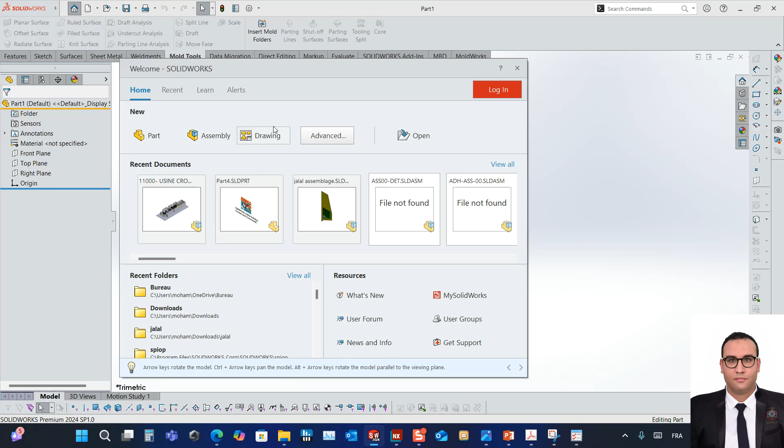And for the fifth and final advanced tool, there is the drawing tool, which is here. If you go to drawing, there is an entire certification specified for drawing. Now, let me go to the presentation and introduce it to you.

So, as you see, this is the certification that I presented to you, and those are the core certifications: the associate level, the professional level, the expert level. In order for you to pass the expert level, first you need to have 4 of those 5 advanced tools.

See here, certified SolidWorks professional advanced. Those are the advanced tools. You need to pass successfully 4 of them in order to be able to pass the expert level. Understand? So this is the way to obtain the expert level.

And there are also other certifications like this sustainable design, which will allow you to reduce the cost of your design and optimize it for a sustainable way, like making it recyclable and less costly. That is the sustainable design certification.

There is additive manufacturing, which is basically 3D printing. There is the simulation certification, which will allow you to simulate almost anything in your mind, like structures, thermals, vibrations, everything like that.

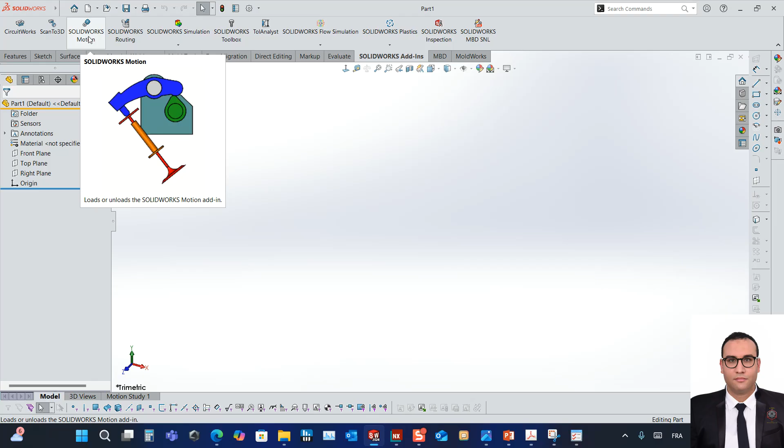This is the SolidWorks Motion tool - it will allow you to create any motion you want. This is the Routing tool, including pipe routing, electrical routing, tubes, everything about piping and routing.

This is the Simulation tool, as you see here. Like I told you before, there is a certification for simulation. This is the Toolbox - all the standard parts are in the toolbox.

This is the TolAnalyst tool, so you can analyze the dimensions in your parts and see the problems if there are any in the dimensions, so you can make the part work properly.

This is the fluid simulation. When it comes to fluid simulation, computational fluid dynamics, this is the other tool you need to use. This is the plastic tool. It will simulate almost any plastic in your injection mold.

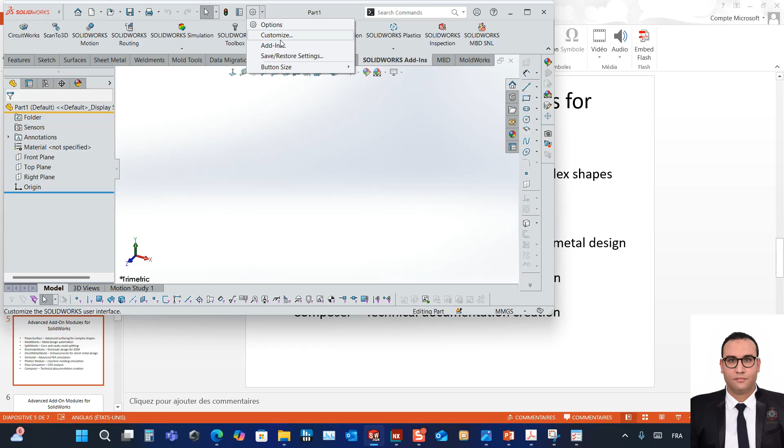This is not all of them. Like I told you before, there are also other tools, like you see here. Those are the basics that I just introduced to you. There are the manufacturing tool, the electrical tool, the SolidWorks Visualize, which will allow you to create good 3D videos or presentations of your product in SolidWorks.

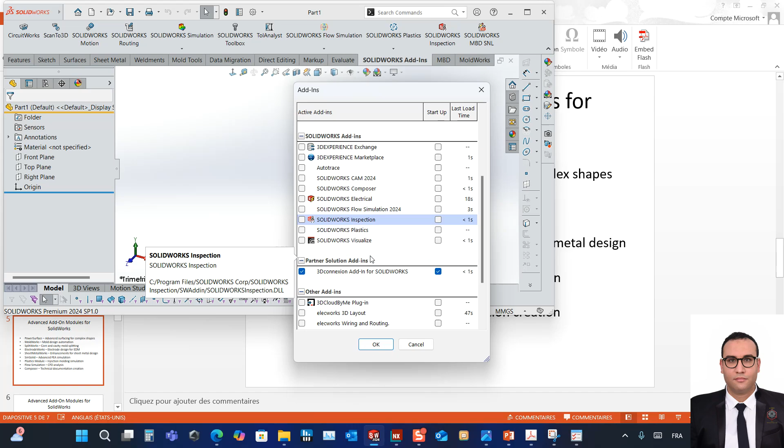And after that, you will have those. What are those? Those are the modules here that I have just introduced to you. Those models will allow you to improve in SolidWorks faster and use it without any problem. And as you see here, those models, I would introduce to you one of those models.

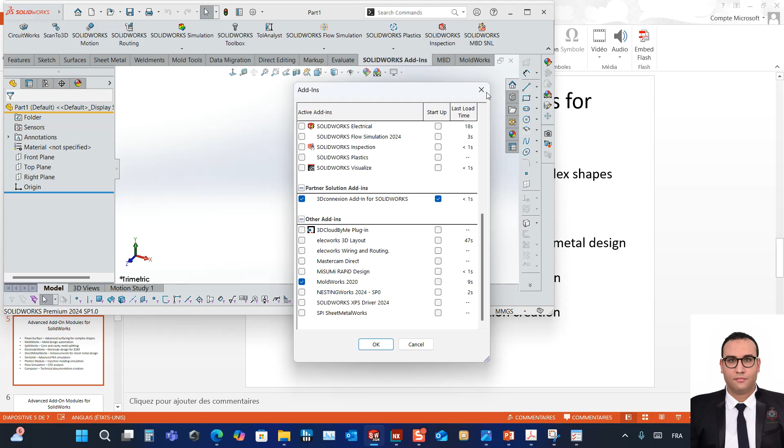If we go to MoldWorks, you'll be creating, in contrary to the normal mold tool, it will be doing, as you see, it will take tabs from the surfacing tool because they need it. Because the mold tool is basically using surfaces to create a separation, which when you have a part, you have a core and a cavity. That's all about it. That's all that will be created in this tab right here, the mold tool. It can do more than that.

But when it comes to creating an entire mold, you need this extension. It will allow you to create an entire mold, to create gates, runners, heat exchangers, everything about molds. It may even contain, like I told you, the standard parts of the real world, like HASCO and Rabourdin, a lot of them. So those modules are for specialized people.

And as you know, there are the normal models, the SolidWorks advanced surfacing. You can add PowerSurfacing to improve this case, so you can specialize in surfacing. You can use sheet metal, or you can add the SheetMetalWorks add-in, because this module will allow you to organize the sheet on the real sheet, so you can know how much it will cost and how much sheet it takes in the real world, because it's not all about creating sheet parts.

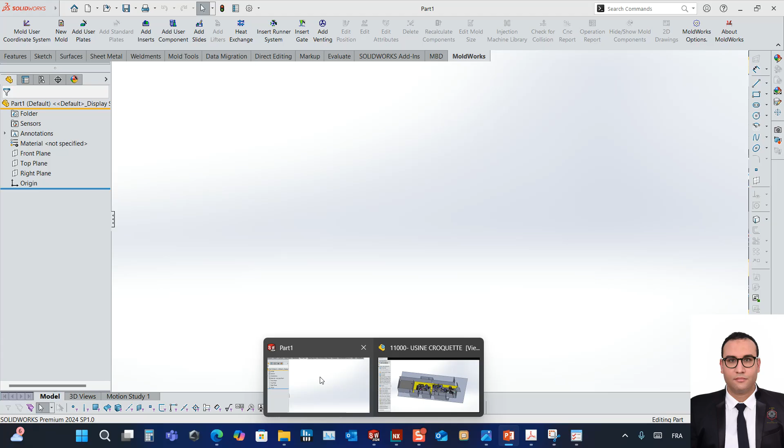As you see, SolidWorks is not hard to learn, but it will take time, and you must be good at it. I will give you an example of why SolidWorks.

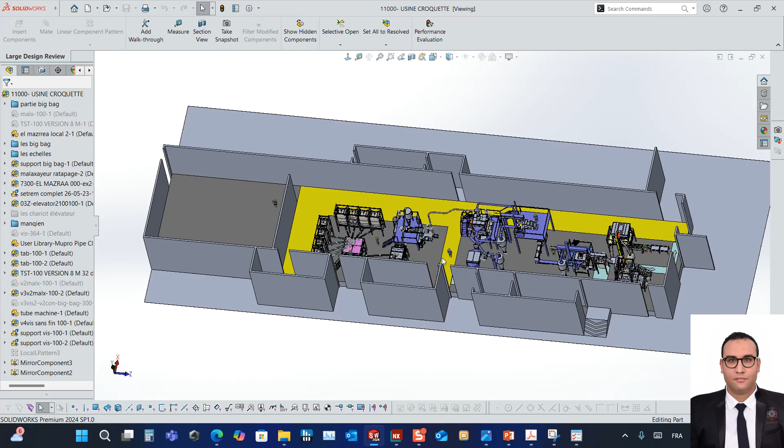See here, when it comes to huge factories that contain a lot of parts, this factory was created entirely by me. It took me 4 months to do it all in SolidWorks, and I will be glad to teach you how I have done it. Like I told you before, when it comes to huge assemblies, SolidWorks is not a good deal, it has a lot of problems.

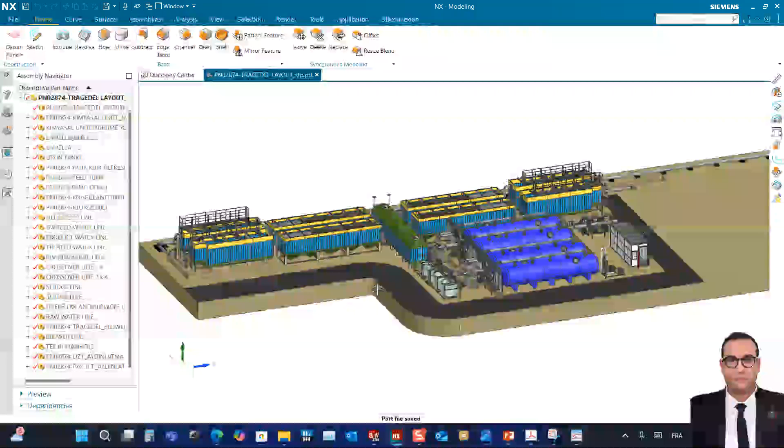So it barely moves, see here, it is lagging a lot. But if we go to another software like this one, you see it is very fast to use. It responds, it is optimized, there is no problem in it. It is optimized for huge assemblies.

On the contrary, because this is high-end software, it is designed to contain huge assemblies. And the interface, this is Siemens NX. It is a good, very good software.

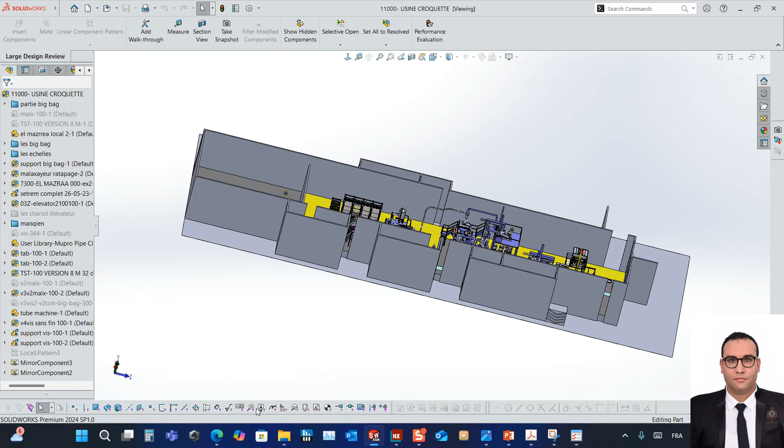But we are going to teach you about SolidWorks, how to use it, everything about it. How you can use the add-ins, how you can start. I'm going to make you a fast tutorial on how to learn sketches, 2D sketches, how to manipulate everything in them, and how to do 3D parts.